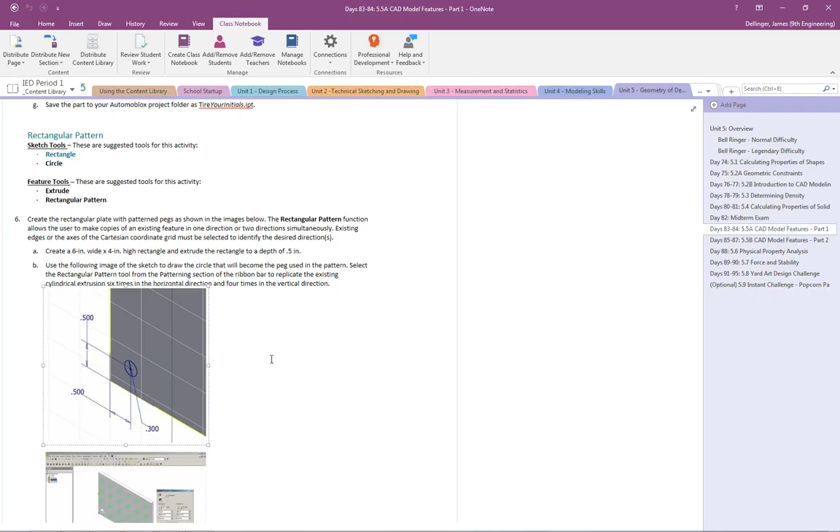The rectangular pattern is actually very simple, so this video should be relatively short. The first thing we need to do is follow the instructions. You should read these - you should always read these.

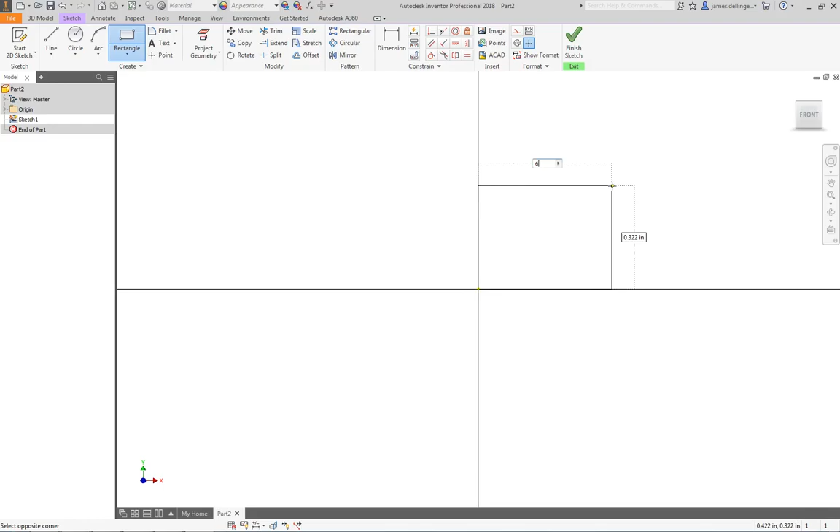We're going to create a 6 inch wide by 4 inch high rectangle and extrude it to a depth of 1/2 inch. So we'll come over here to Inventor, start a new sketch, select our plane, and pick a rectangle. This should be 6 inches wide - hit tab, 4, enter. Now I have a 6 by 4 inch rectangle. Oops, zoomed up way too far. Finish the sketch, and we'll extrude it - should be 0.5 deep. And now I have this.

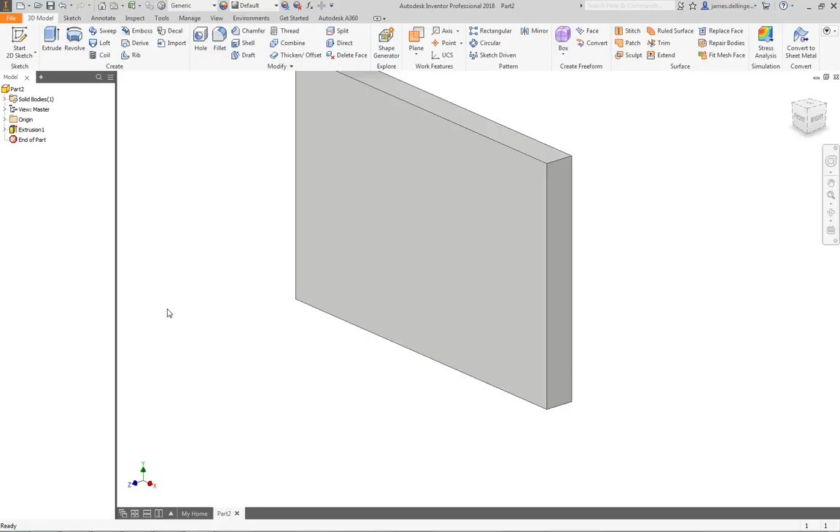Now I need to put in a circle from the corner, 1/2 inch over, 1/2 inch up, and it's a 0.3 inch circle. So I'll come over here, make a sketch, draw my circle. We'll say it's 0.3. Then I'm going to add my dimensions from here to here - oops, hit the wrong button, hit escape, try it again. Dimension from here to the center point, 0.5. From here to the center point, drag over, 0.5. So now that's locked in place.

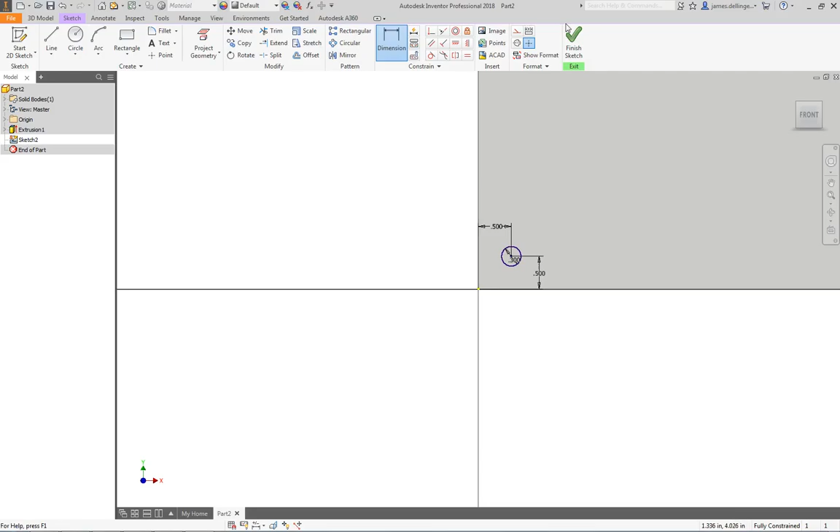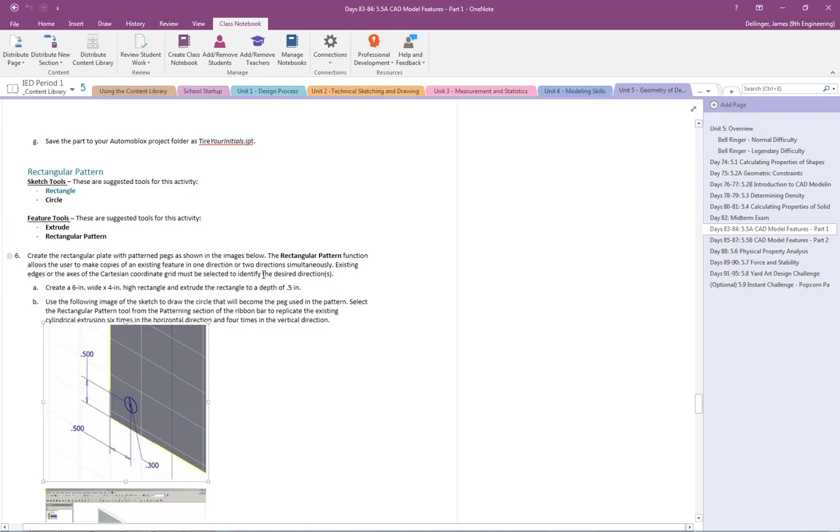And do they want us to do it as a feature? So yes, they're going to do this as a feature. Finish the sketch - how far up do I need to extrude it? Does it say? So the peg, it probably says in there - we're going to go 1/2 inch because I don't see it there. So we'll just go 1/2 inch. It doesn't matter, it probably looks a little bit more. Let's go 0.375, that's probably a little bit closer. Let's say 0.3 - at this point it doesn't matter.

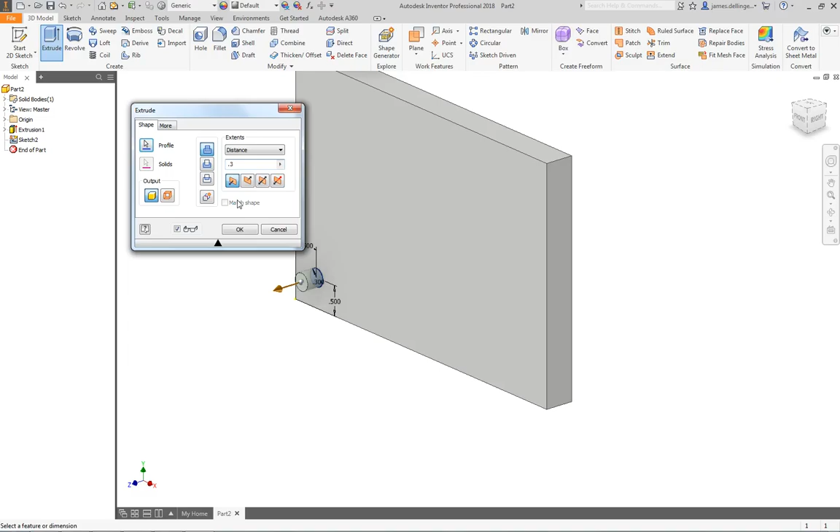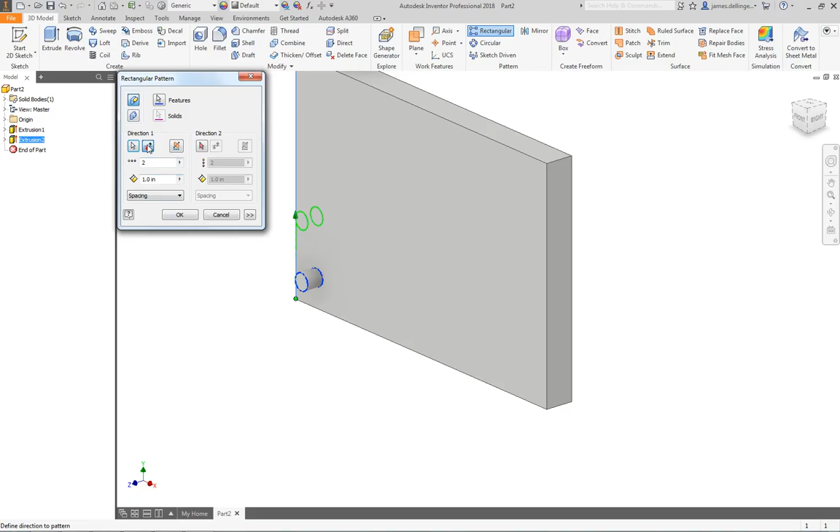So we have Extrusion2. Just like before, we're going to go to the pattern command and say rectangular pattern. We're going to say - well, I want a feature, I want to pattern this extrusion. I want it to go in direction number 1 this way. That's going the wrong way, so I'm going to flip it. And I want that to go 4 times, so I should say 1, 2, 3, 4.

And then direction number 2 is going to be the x-axis. You can pick either way, you just have to put in different numbers, whatever works. So that's going correct - I need that to go 6 times. And I hit OK. Now I have a bunch of patterns, a peg that's been patterned 24 times.

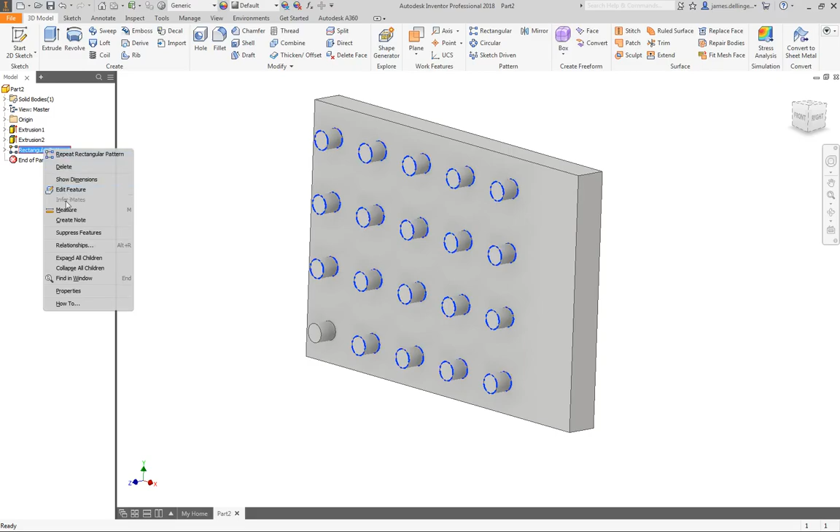If you ever need to go in and change this - this is not part of the assignment, but if you go right click, edit feature, you can say, you know what, I need this to be 5. And then you can change it to 5. The other part is if you go right click, edit feature, you know what, I want this to be 6. But those are not spaced the way I want them.

And I want this to be spaced 0.75 and this to be 1.5 - that's probably too much, let's try 0.5. And we'll leave that at 1. Then you can change the pattern spacing as well. So I can go back here, edit the feature - it should be 1 and 1. And there is your pattern.